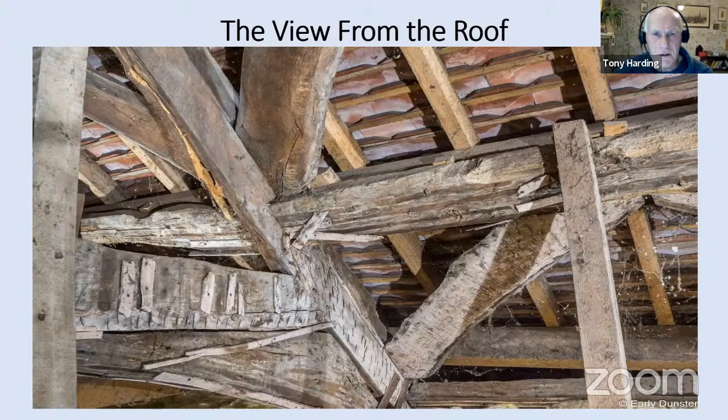So we're going to go on a tour of Dunster roofs and look at some of these features and methods. We'll stop off on the way from time to time to reflect on a couple of questions. The first one is, how can these differences in carpentry methods help us to date the building? We're very fortunate with Dunster that a number of buildings have, over about the last 6 years, been tree ring dated.

Tree ring dating, very briefly for anyone who doesn't know, is you take a sample of the timber and look at the relative differences in the widths of annual growth rings, and compare that with reference data. You can arrive at a date the tree was felled, and from that derive a date the building was built. You can get quite accurate dates to within sort of 20 or 30 years.

A lot of that dating was done by Andy Moir of Tree Ring Services as part of the Time Team study on Dunster, between, I think, about 2016 and 2018. It's really good to have those dates because they form a good basis for comparison with other buildings where we don't have tree ring dates, and we can do this comparison in what they call stylistic dating.

The other question, more of a philosophical one, is can we, by looking at carpentry methods, identify the work of a specific carpenter? I'd love to get to a point where I could say there's two houses built around the same time, and I reckon they were built by the same person. And if we can answer that, the tempting question that flows from it is, who was that carpenter? Whether we can answer that, I don't know, but let's have a go.

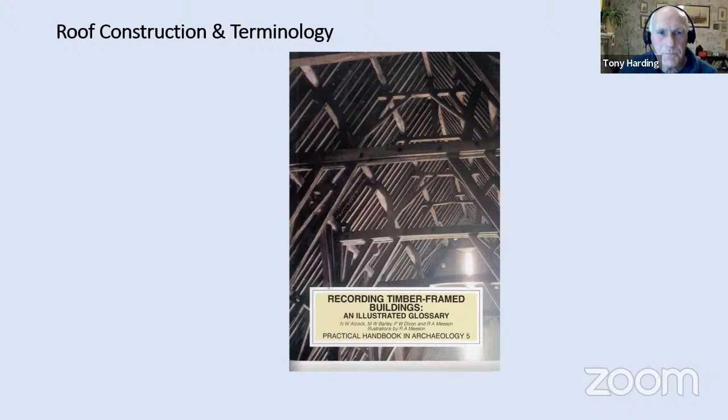So the basic building block of a timber frame building is a truss, sometimes called a cruck—a cruck is a special type of truss. I'm sure some of you joined Nat Alcock's superb webinar on cruck building back at the end of 2020. I'm not going to be specific about crucks this evening, I'm going to be more general and call them trusses.

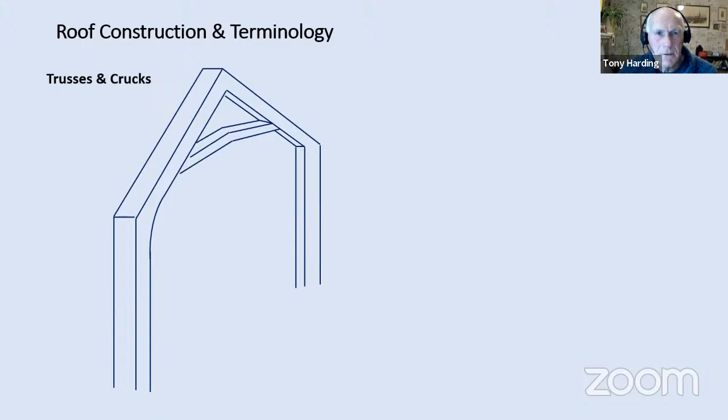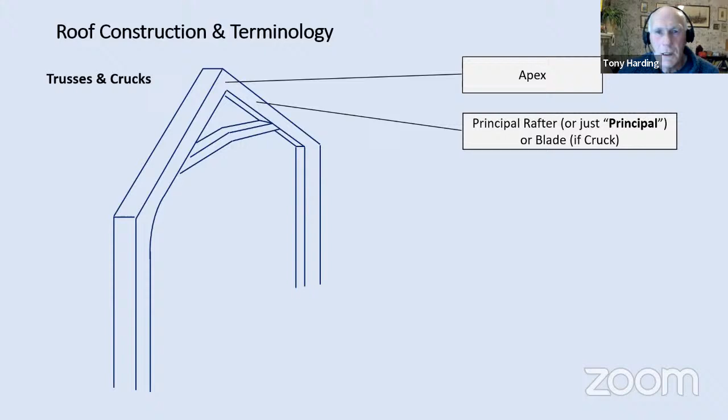To make a timber frame building, you start with the anatomy of a truss, two or three key features. It's like a big capital A, and at the top you've got an apex where the two halves are joined together, then a sloping portion which defines the pitch of the roof. That's got a number of names—it can be called a principal rafter, just a principal, or a blade if it's a cruck. I'm just going to call it principal tonight.

You then have the horizontal piece through the middle, called a collar—sometimes called a tie beam, but to me a tie beam is another horizontal member a bit further down, around the top of the walls, so that collar I'm going to call a collar. Then you've got the post, the vertical bit, post or foot. We don't always get to see that on our surveys, because it's very often now buried in the walls of the building. That's the anatomy of a truss.

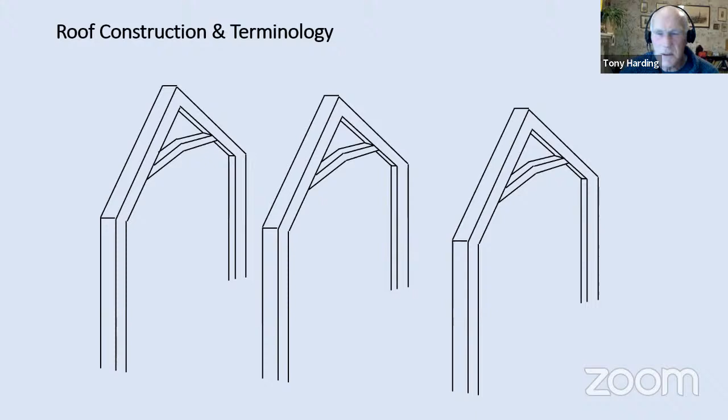A timber frame building is based around a series of trusses lined up—anything between 3 and 7 or 8, depending on the size of the building. Then there's a number of other timbers that go around those trusses, which we'll look at, not necessarily in the order in which the building is constructed.

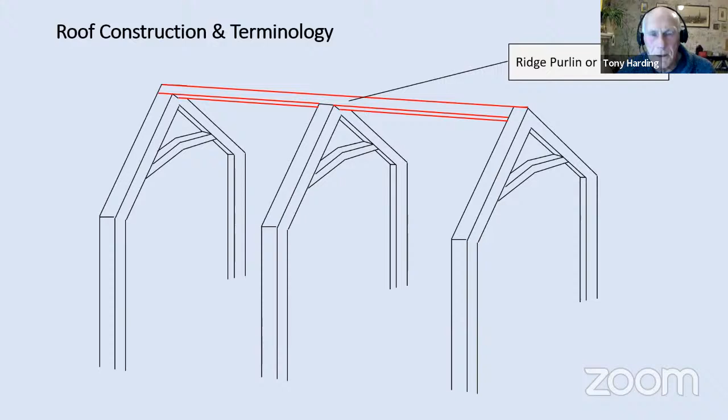Running through the top, you've got a long timber, called either a ridge purlin or a ridge plate—a bit of a semantic difference. If it's set diagonally, it's called a purlin, and if set flat, it's called a plate. Not quite sure why it's called a plate—plate to me says thin and flat, not long and square, but there we are, that's the terminology.

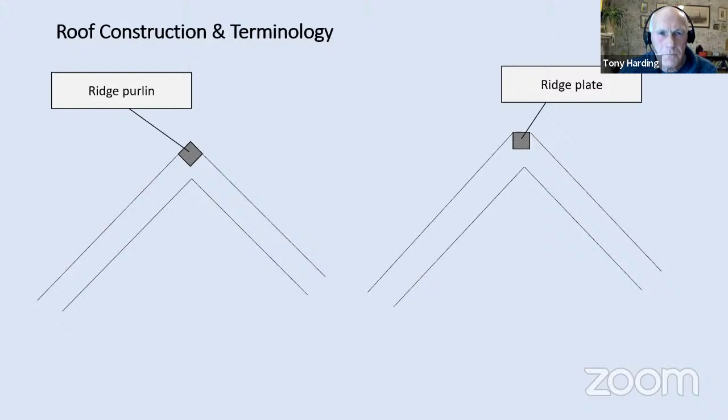Then below the ridge purlin or ridge plate, we've got some side purlins, and there may be 2 or 3 sets of these between the ridge and the top of the walls, depending on the size of the building. And then we've got what I call the pretty bits, the decorative bits.

You've got wind braces, which help to stabilize the building against lengthways distortion, racking as it's called. And you've got arch braces, again curved members, which help to stabilize the building against side-to-side distortion. You don't always get those.

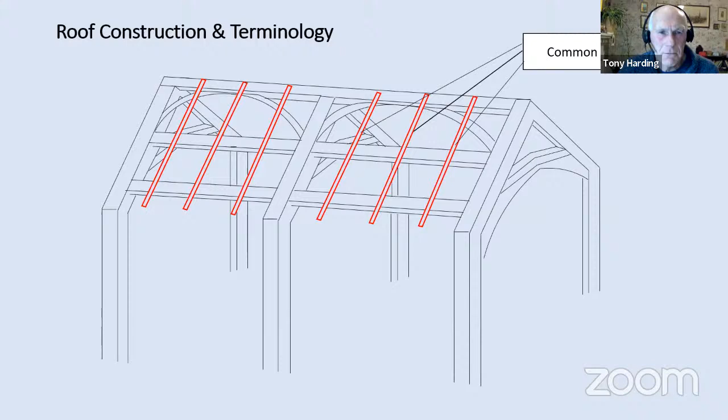You get those in some buildings, but not in others. On top of all that, you've got some common rafters, which rest between the ridge and rest on the purlins down to the top of the wall. And over that, you've got the roof covering, typically thatch in these early buildings.

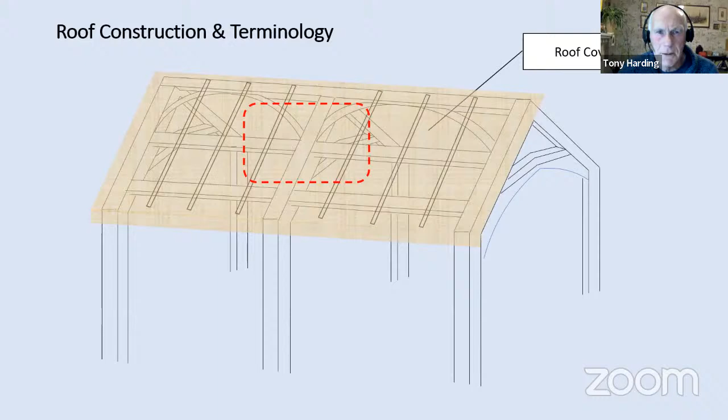So you can see, if you just look at this little red rectangle here, you can see how it starts to look like that picture that we started with. So that's a brief look at the anatomy of a roof.

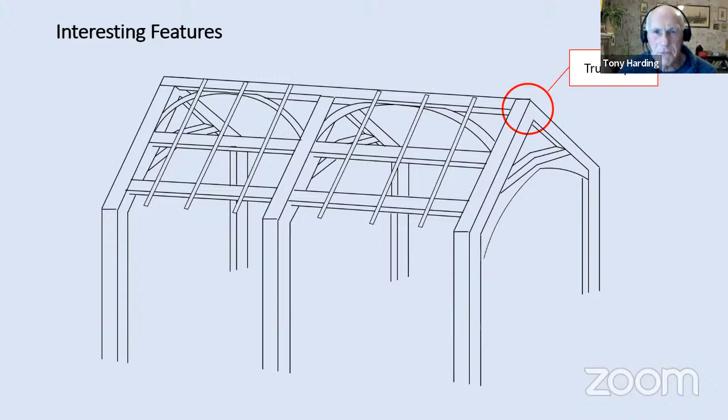So some of these interesting features, these methods that carpenters had - we're going to look at 3 areas tonight. We're going to look at the apex of the truss, where the principals are joined at the top, and there's a number of ways of doing that. We're going to look at collar joints, where the collar joins into the principal, and we're going to look at purlin joints, where the purlins intersect with the principal rafters. So these are the 3 areas that we're going to be looking at.

I thought it'd be useful first of all to pause and think about what makes a successful timber joint. Well, fairly obviously, it needs to join 2 or more pieces of wood together. But it also needs to withstand all the forces, or loads if you like, acting on it. And to enable it to do that, it helps if, when making the joint, we minimize any weakening of the component timbers. If you think about it, making a joint in timber almost invariably involves cutting wood away, which inevitably weakens the timber to some extent.

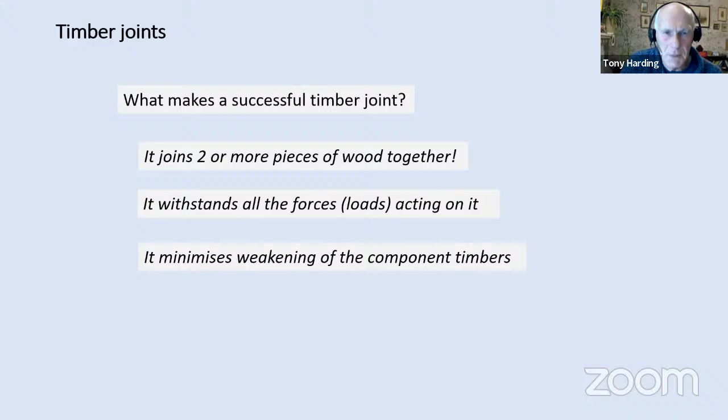So onto truss apexes then, and I may lapse into calling them apices. The reason for that is back in 1972, alongside my O-level in woodwork, I somehow miraculously gained an O-level in Latin. And there's a fragment of the Latin scholar in me that says the plural of apex is apices - index, indices, apex, apices - but I'll try and call them apexes tonight.

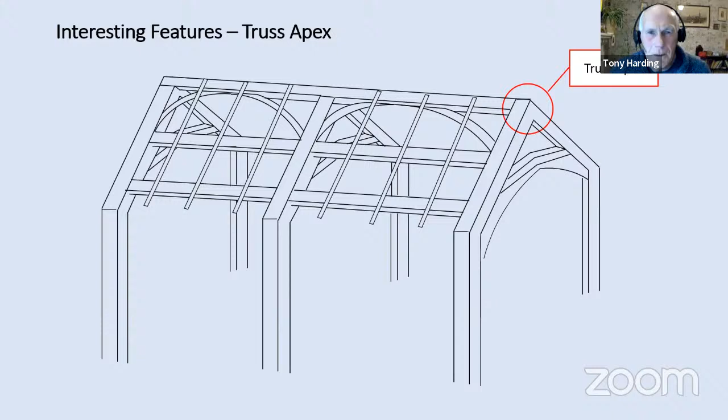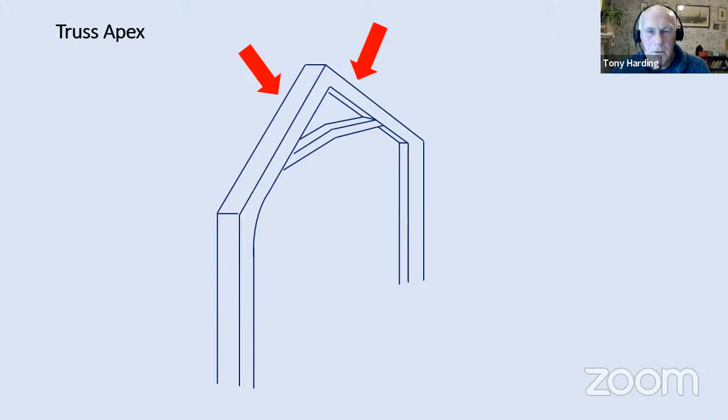So truss apexes, there's been quite a lot studied and written about apexes over the years. If you're just thinking about the forces bearing on the apex joint, it's got a bit of an easy life in a way, because in general the force on it is the weight of the roof, which tends to push the joint together, to hold the joint together. Not always the case, as we'll see.

But there's been quite a lot written about apexes and studied down the years. One of the milestone documents was a report published, I think, back in 1981 by the Council for British Archaeology - CBA Research Report number 42 - which brought together all the knowledge specifically about crucks at that time, and organized it into chapters and categorization.

One of the things it looked at was apex types, and it includes this, I think, really nice title of a pedigree of cruck apexes. I like the term pedigree because it suggests an order of descendancy, an order of development for apexes. And also I think pedigree is a suitably respectful term for the levels of craftsmanship that we've got going on here. So I like pedigree.

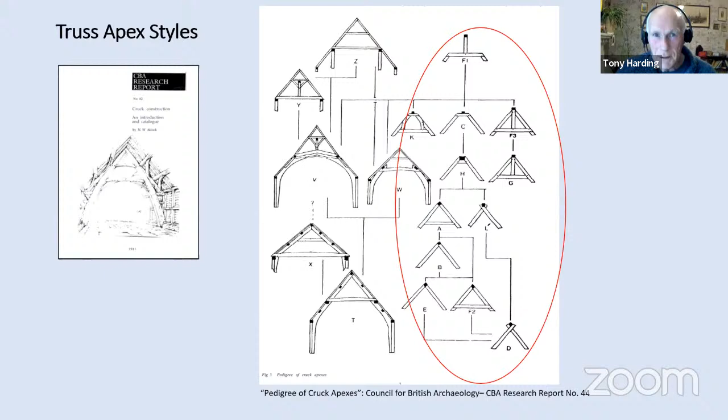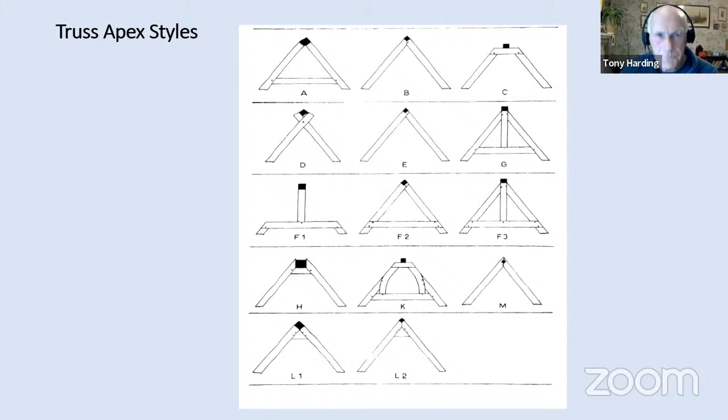We find quite a lot of these apex types in our surveys in Dunster, with some common ones in that red circle there. There's a table elsewhere in this CBA research report which just breaks out those common forms. So what we're going to do now is take a look at some of those forms and examples of where we found those in our surveys in Dunster. And the first one we'll start with - they've got letters that they're designated by. Don't worry too much about where those letters came from.

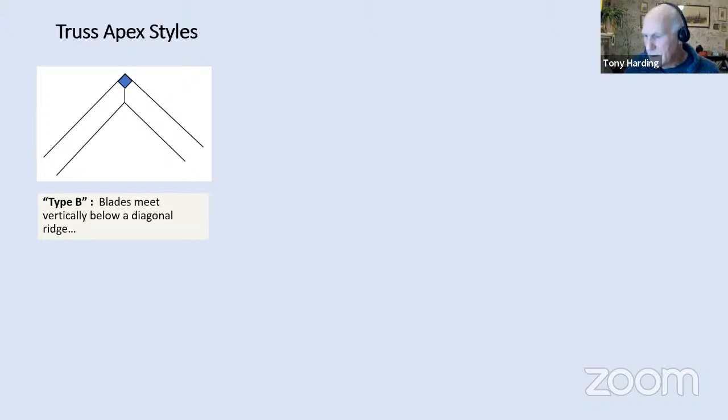Just go with the flow that it's called a type B. Type B is a fairly simple apex form. It's got the blades, and I'll talk about blades here because all these apex styles relate specifically to crucks.

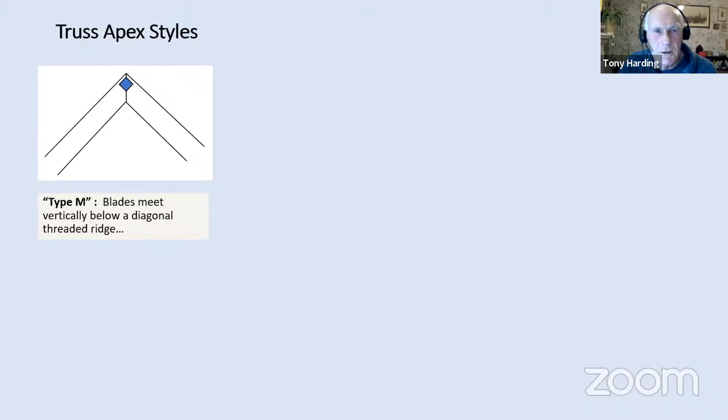Very similar to type B is a type M. It's a little bit more complex, a little bit more sophisticated, in that the ridge purlin, instead of sitting on the top, is actually threaded right through the apex joint. Here's an example of one. When I first saw this, I immediately thought it was a type B, but you can see the purlin is set down a little bit from the top, so it's actually one of these type M's.

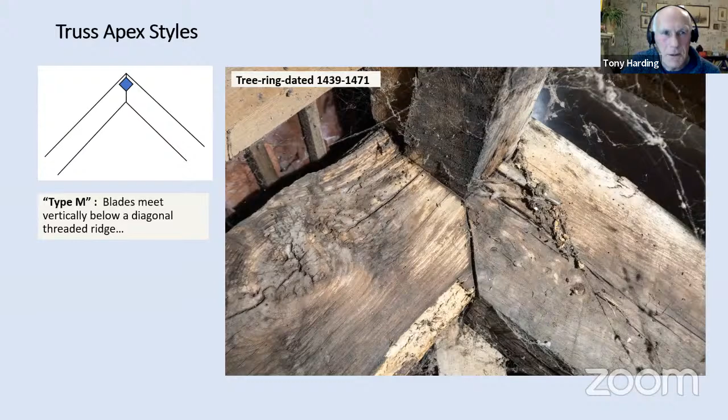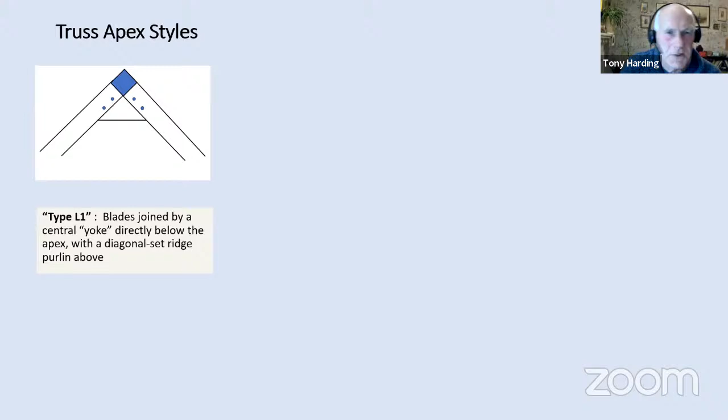So that's type M. We've got a type L1, and that's got a triangular block below the apex with again a diagonal set ridge sitting on there.

Then we come to type C, and a bit of a difference with this one. There's this saddle that sits above with a square set ridge sitting on the top there, and we've got an example of that.

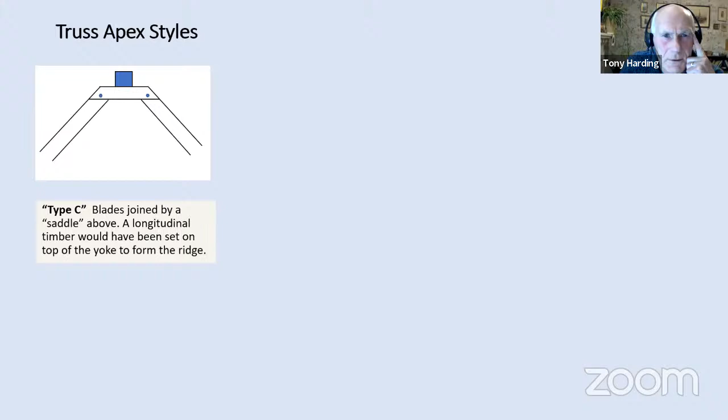You can see it's seen better days, this one. It's in a bit of a state of disrepair, and I will say at this point, people of Dunster and other dwellers of old houses, you will see some pictures in this evening's presentation that do show things in a bit of a state of disrepair. Don't worry, your roof is not about to collapse. Wherever there's been any deterioration of these trusses, they've invariably been reinforced and repaired, or there's another complete roof over them and they're still in place, but they've been relieved of their load and are now enjoying a well-deserved, well-earned retirement. So don't worry about what you see.

But you can see on this one, the right-hand side here is intact, but this left-hand principal has collapsed inwards. If you think about the load, the main load is the weight of the roof bearing down, and it's actually snapped this one and it's fallen inwards, and then there's been some masonry put around it in the position that it's in.

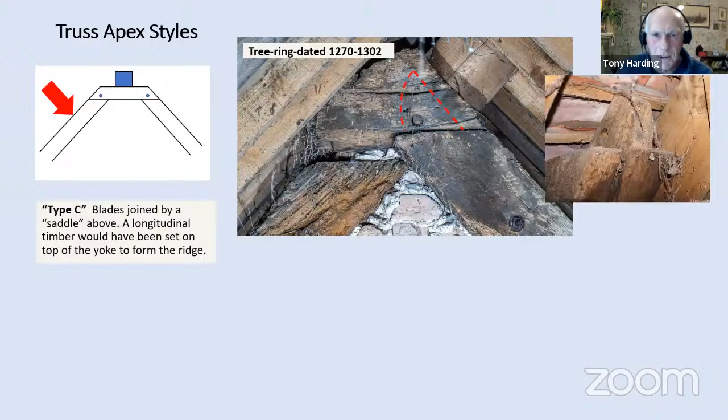Up inside there's another truss in this roof, the same style, and that top saddle is completely missing. You can see it's got this peculiar sort of horn-shaped tenon on the top that goes up into the saddle, so it's up inside there like that. I guess that's snapped in this case.

Now, one of the beauties, I think, of digital photography is we can use it to do a bit of digital carpentry. So what I've done here is a bit of recomposition. I've taken the right hand side, the good side of the apex, and glued a mirror image of it to the other side, so we can start to see what that apex would have looked like originally. So that's a type C.

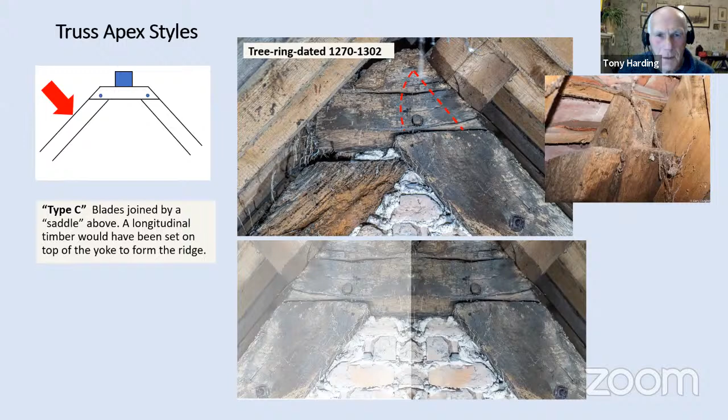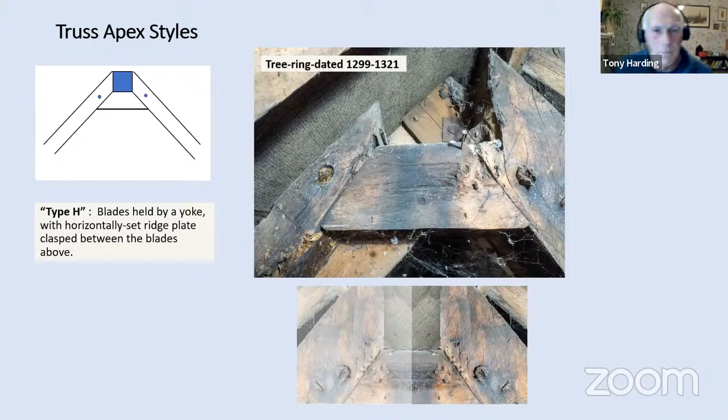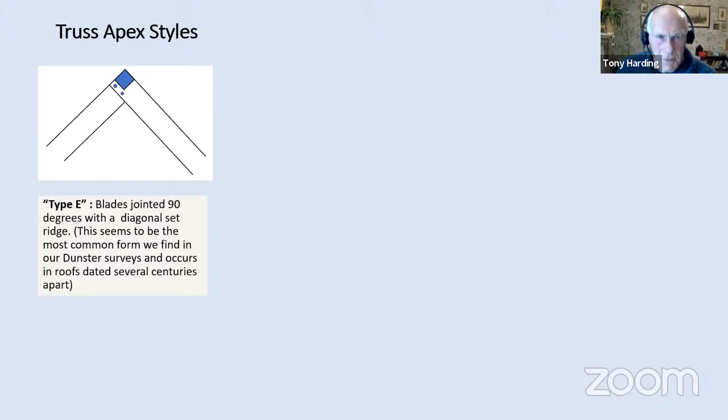Then we come to type E, and it's by far the most common type we find in Dunster. They seem to have been concentrated mainly in the southwest, and probably well over half the apex styles we find are type E. It's also one that's found its way into other types of truss and into later post-medieval trusses, some of which are modelled on this type E.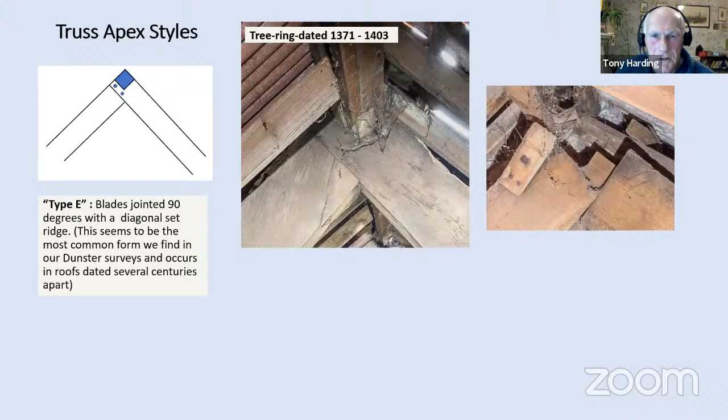Here's an example from a fairly early building, back end of the 1300s. Here's another one, and up inside there it's joined with a mortise and tenon joint. You can see this rectangular tenon on the top of one principal, which locates into a mortise cut on the other side of the principal.

Here's one to demonstrate the point. This one is probably as late as the 1700s, but it still retains this type E format, using the Cruck technology from medieval times.

And then a couple of later forms of apex. There's one which seems fairly obvious to me, where the blades, the principals, cross, and the ridge just sits in the V at the top. It does actually go back to Cruck days, to medieval times, and was called type D back then. But this one is much later, probably an 1800s, maybe even 1900s roof.

And then we've got this one. We've seen this in 2 or 3 buildings, a later form, with two principals, and either side of them nailed, in this case I think, a couple of yokes. You've got this sort of sandwich. Not quite sure what happens up in between there, whether it's a vertical join or a diagonal join. I'll have to go back and probe around inside one of these to find out which way it's done.

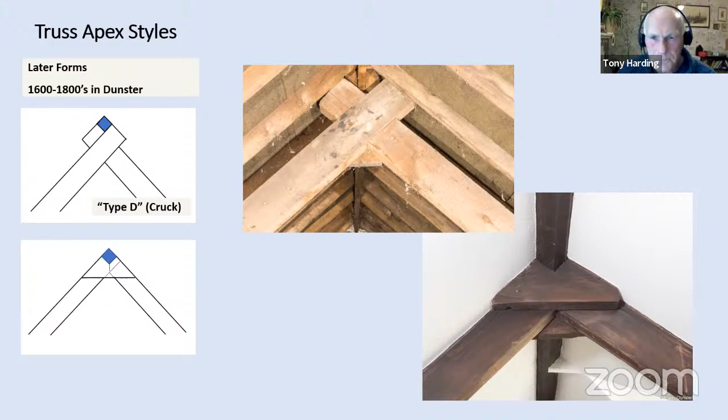So you can see we've got quite a number of different styles recorded in the roofs of Dunster. I guess I've got a sort of game of apex bingo going on here - I just need to find a type A somewhere, and I can complete the top row.

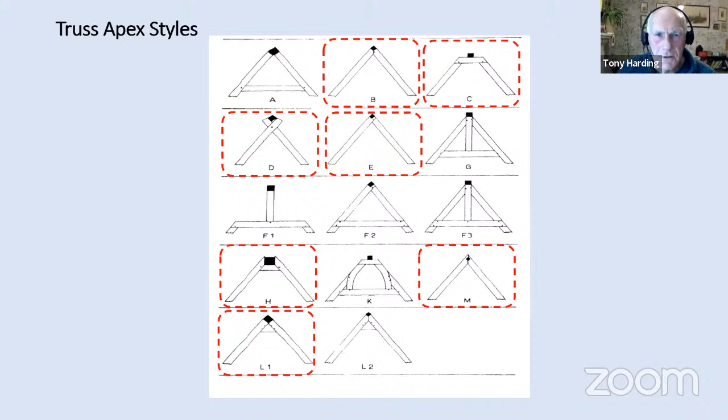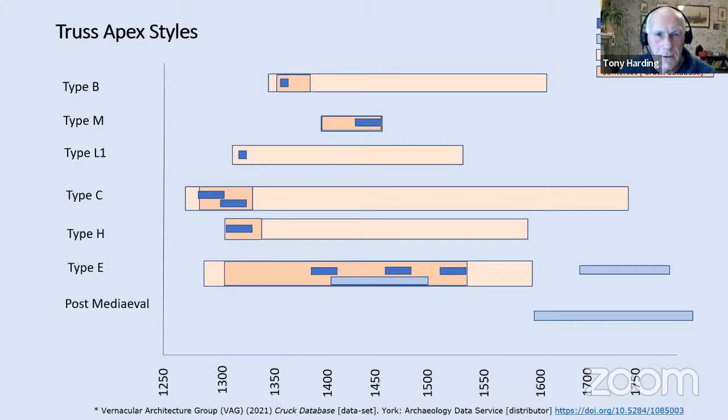What I find equally interesting though is rather than look horizontally across this chart, to look vertically down it. If we look at a couple of decades either side of the year 1300, it looks like in Dunster we had at least 3 different apex styles in play - we've got type L1, type C, and type H going on there.

The question that prompts me to ask is, what determined the choice of apex style for a given building around that time? And possibly more relevantly, who defined it? Was it the choice of individual carpenters? We've got these 2 buildings built a couple of decades either side of 1300, so probably within the career span of a single carpenter. I'm starting to ask, were they then the work of the same carpenter? Was there more than one carpenter in Dunster around 1300 doing type C apexes? I wonder.

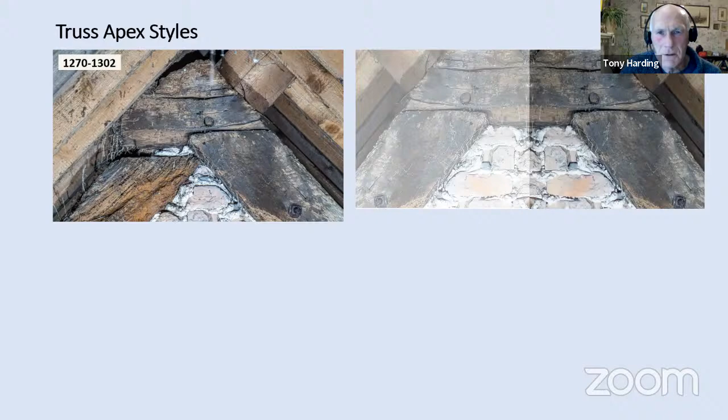And here they are. Here's one that we've already looked at from probably just before 1300. And there's another one 10 or 20 years after 1300 that looks quite similar. Again, it's suffered a bit of deterioration, so I've done the digital reconstruction and put it back together. Yes, they do maybe look sort of similar.

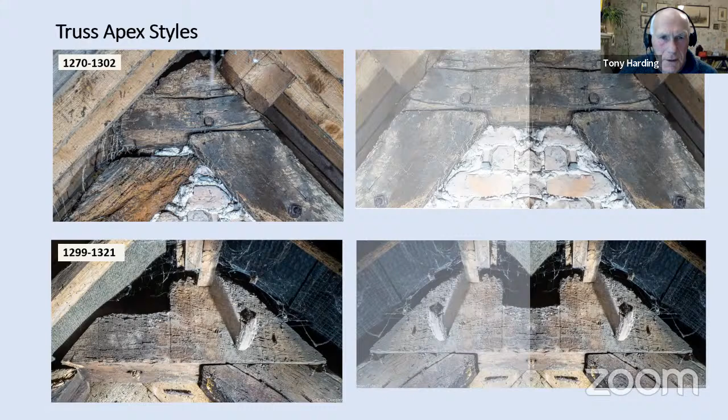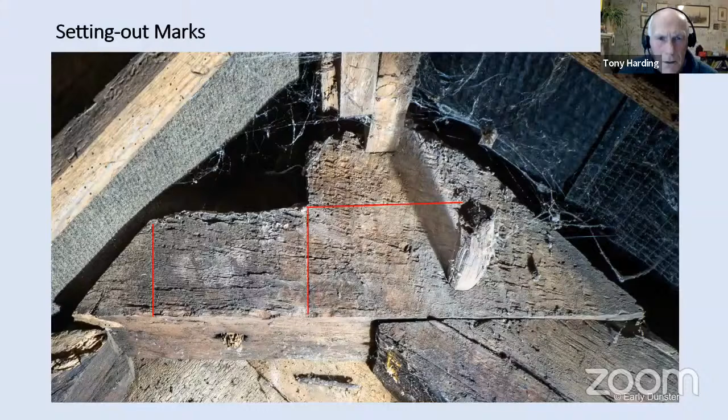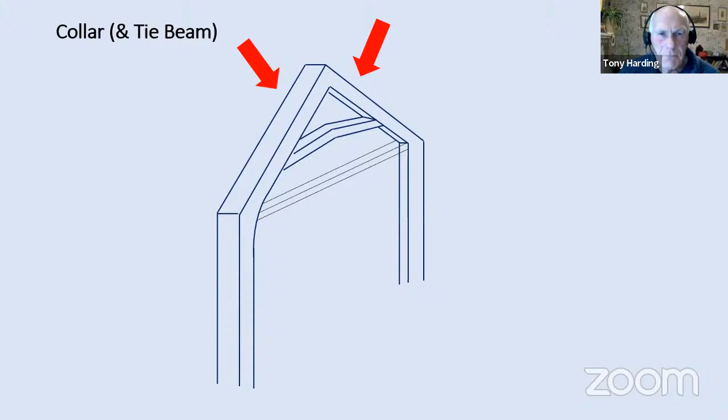So that's apexes. We'll move on now to collar joints. Collar joints are quite a bit simpler in a way. There's really only two types that prevail. The job that the collar joint does is, if you think about the truss, the load bearing down on it is the weight of the roof, and that's going to try to make the apex, the truss, sink and spread, and the feet, the posts, to move outwards.

Now that's pretty disastrous, really. If you think about the posts in a lot of these buildings were set in cob walls, and if those posts start to move outwards, that's potentially quite catastrophic for the building. So the collar does an important job in binding the truss together, and you can see a tie beam lower down again. The tie beam does the same thing.

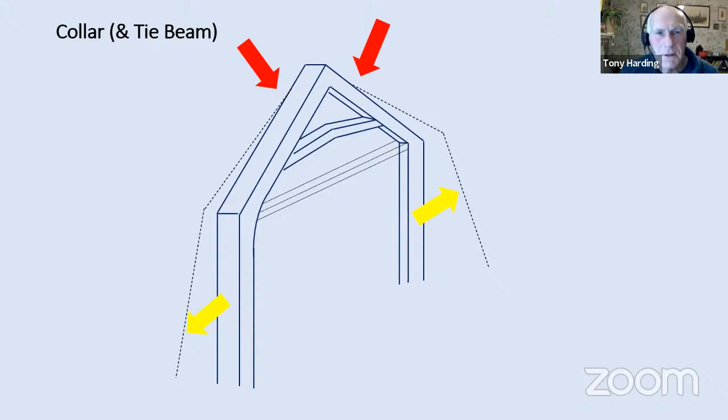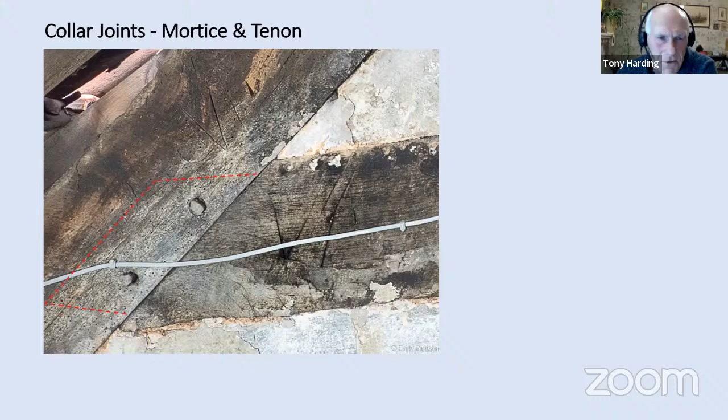So if we look at the collar joint, where the collar joins into the principals, there are two types. Most of the ones we find are a mortise and tenon. So there's a tenon, a peg if you like, cut on the end of the collar, and that houses into a corresponding mortise cut in the underside of the principal. So you can see the sort of shape of it speculatively there.

Here's one where you can see this spreading that I talked about has started to happen, and it's just temptingly revealing the shape of the tenon inside there. Again, people at Dunster, dwellers of old houses, don't worry, this has all been very competently and robustly reinforced. There's another one where the principal has sort of failed completely, and it's given us a unique glimpse inside of the shape of that tenon. I love this particular image. I think that's a fantastic bit of craftsmanship for something that's 700 years old. I never tire of looking at that, and it's sort of unlocked the mystery for me of what happens inside that joint at the end of that collar.

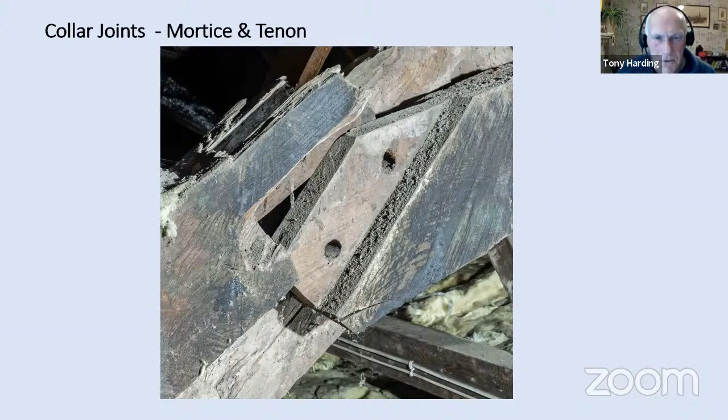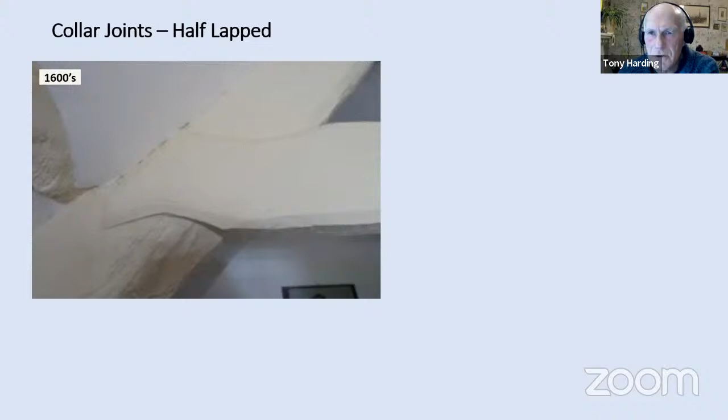So that's mortise and tenon collar joints. The other form we find is a half lap form, where instead of a tenon extending up inside the principal, you've got a sort of dovetail shape, some sort of profiled shape on the end of the collar, and that sits into a housing on the face of the truss, on the face of the principal. And we find these in later houses in Dunster, most of them sort of 1600s and 1700s. You can see a couple of other examples here. There's all sorts of variations for the exact shape of that end, but the ones we find are all later. But it is known to have been a very early form of joint as well.

One of the great recorders, perhaps the greatest recorder of timber buildings, was a man called Cecil Hewett. He did his work in the sort of mid-60s up to 1980. He recorded hundreds of buildings ranging from Saxon times right through to late 1800s, and identified and documented, and his books contain fabulous diagrams of just about every joint type that you could imagine. Hewett recorded these in very early roofs, 1260 and beyond, and also early examples have been recorded in Devon, just across the border from Dunster. But it's odd that we've not found any early examples of that in Dunster. We think sort of 1600 and beyond.

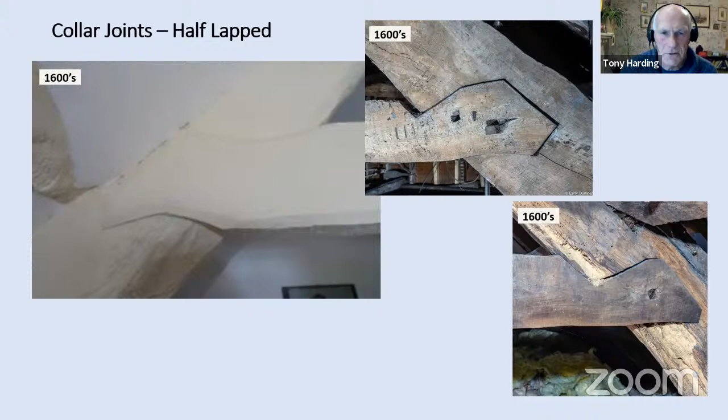There's another one there a little bit later. Again, you see it's the same thing, but without that dovetail shape, which helps to prevent spreading. But having said that, this one seems to be staying pretty much intact.

An interesting little juxtaposition that I only discovered in putting the slides for this evening together. Here's a cruck frame, the darker timber, from around 1400, and you can see it's needed a bit of reinforcement. What's happened, and it was quite a common technique, is to take timber salvaged from another building that's either derelict or being demolished, and use it to reinforce trusses in an existing building. That's what's happened here.

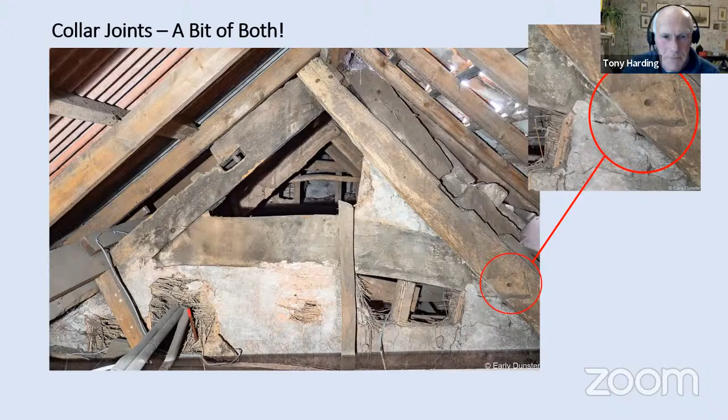There's this lighter piece of timber that's put on, effectively like a splint. It wasn't until I was putting this together that I noticed that on that piece of timber used to reinforce it, you can see the imprint of one of these half-lap dovetail joints, and there's another one there. So we've got a truss here with a mortise and tenon collar that's been repaired with timber from a truss that had a half-lapped collar. What I don't know is whether that timber came from one of these very early half-lapped collar joints or from one of the later ones. But I just thought it was an interesting little juxtaposition — don't always believe what you see.

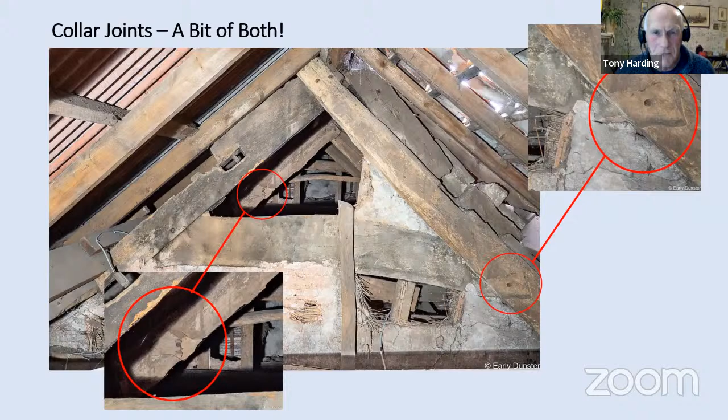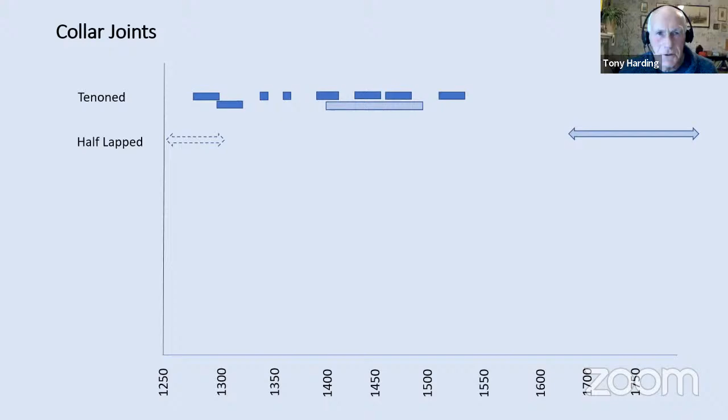So, lastly then, on to purlin joints. I think purlins are, to me, the unsung heroes in a roof. You've got a nice roof with the trusses standing there all strong and majestic, and the arch braces and wind braces all curved and decorative, and the old purlins just quietly get on with the job.

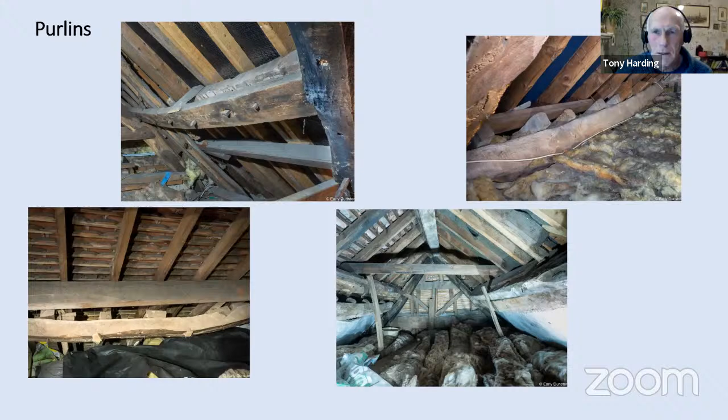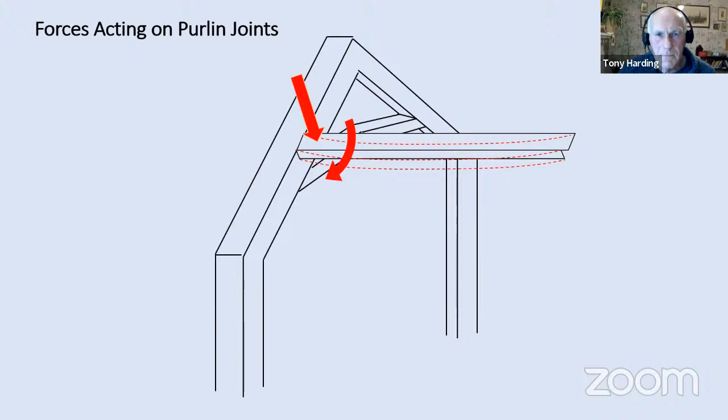And equally, it must be a tough job being a purlin joint. If you think about that joint in terms of forces acting on it: we've got the weight of the roof trying to shear the joint. As the purlin bends, there's a rotational force on the joint. There's also a tendency for it to twist as the purlin bends and the roof bears down on it. And any shrinking of timber or lengthways, longitudinal movement of the trusses is trying to pull the joint apart. So the old purlin joint is being literally pulled in all directions, and if that joint fails, it's obviously got quite a catastrophic impact on the roof.

So not easy being a purlin joint, I would say, compared with an apex joint, which is sort of being pushed together by the load on it.

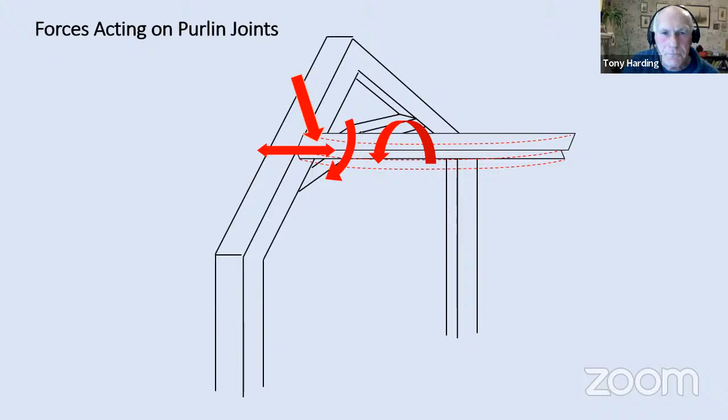There are a number of types of purlin joint that have been classified over the years as building recording has gone on. There's a couple we won't mention because we haven't found them to date in Dunster, but there's three types that we do encounter. The first, simplest form perhaps, is what we call a trenched purlin — very simply the purlin sits in a cutout, a trench on the upper side of the principal, and it just sits in there.

There's another type then, a threaded purlin, where you've actually cut a hole, a mortise, right through the principal, the same size as the purlin, and the purlin is effectively threaded through that mortise, through that hole in the principal.

And the third type, tenoned, sometimes called butt purlins. I'm going to call them tenoned because I think butt is a little bit more specific probably to one particular type. So more generally, we'll call them tenoned. We'll look at some examples of each of those in turn.

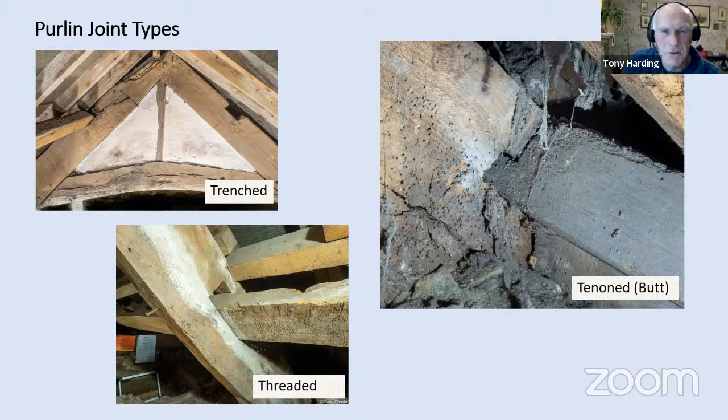So trench purlin joints. Here's a couple of examples. This one you can see it is actually pulled out. What you can see on the top left there, there's been a new roof, and it's not uncommon for a new roof to be put right over the original one. So that truss is one of these that's now happily retired, but it's revealed that trenched purlin joint, and there would have been a peg securing it into the principal there.

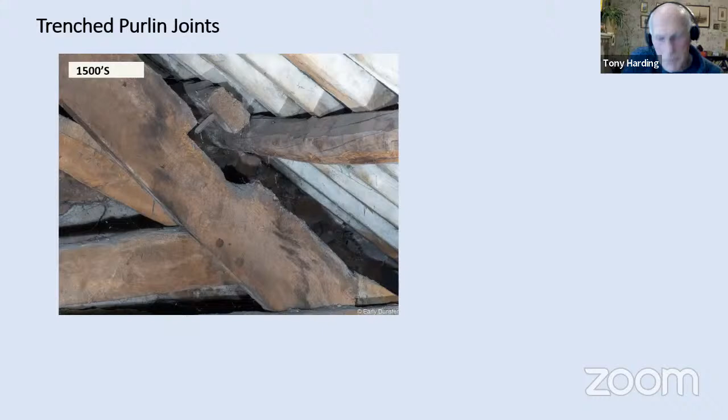And here's another example from one of those very early roofs, so just pre-1300. I've got my suspicions about whether this one is actually part of the original carpentry there. I think trench purlins can sometimes be a result of later modification and refurbishment.

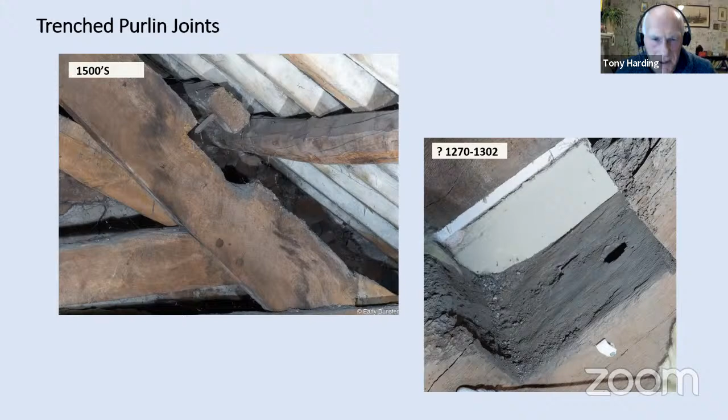If you think about it, if you were replacing a purlin in a roof - this is just practical speculation on my part - but I think you would tend to use a trench purlin, because if it was previously a tenon purlin, jointed into the principals, then you've got a problem replacing that like for like, because to fit it in there you would need to spread the trusses apart. So I think some of these trench purlins could be a result of later refurbishment, which is possibly what's happened there.

Similarly, if you're replacing a threaded purlin, you've got the challenge of threading a long piece of timber through that roof. So just beware of trench purlins, that they may not necessarily date from the original.

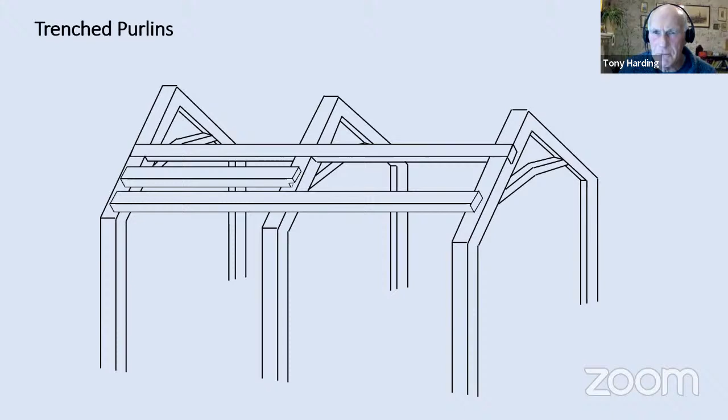One that I'm a bit more confident is original work is sometimes we get what we call a locking rib in the bottom of the trench. So instead of the trench being cut right out to a flat base, there's this rib left in there, and the purpose of that is to stop the purlin moving lengthways, longitudinally, relative to the truss.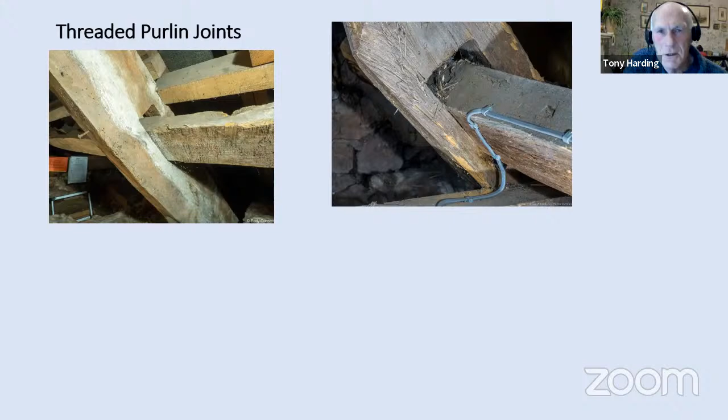Disadvantage of that is you're actually cutting - there's probably a fairly extreme case here - but that's quite a hole cut through the truss, through the principal rafter there. So thinking about our requirements for a joint, that's probably had a significant weakening effect on the truss. Having said that, that's been there for 600 years and is still going strong, so it's probably proved me wrong.

Although they're called threaded purlins, that's a little bit of a misnomer in a way, because sometimes the purlins are actually joined within that mortise, usually with some sort of splayed join. Ignore this bit of timber up here, that's new, but you can see the splayed end of the purlin in there. And here's another example, you can see the start of the splay there, and the length of purlin coming in from the other side would have been splayed in the other direction, and the two would fit together.

So lastly, we'll look at some tenon purlin joints. Here's probably the most basic form. Again, this is from the second half of the 1400s, and you can see there it overcomes the problem of cutting a great big hole through the principal, but you overcome that by forming the end of the purlin into a tenon, which then fits into a smaller mortise in the principal.

You can see it there. I've outlined the shape of that tenon. So if you imagine a section through that joint, you've got the purlin there with that tenon extending into the principal rafter.

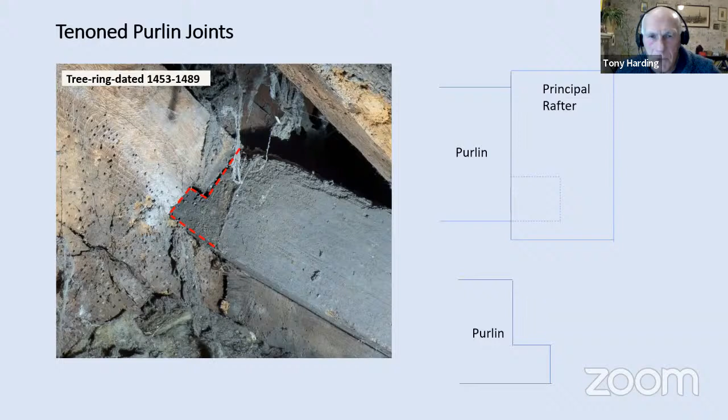The disadvantage for that - you've overcome the problem of cutting a great big hole in the principal, but you've compromised the purlin somewhat, because if you think about that shear force bearing down on it, you started off with a purlin that thick, and effectively you've reduced it down to something like a third of its size, and therefore a third of its strength.

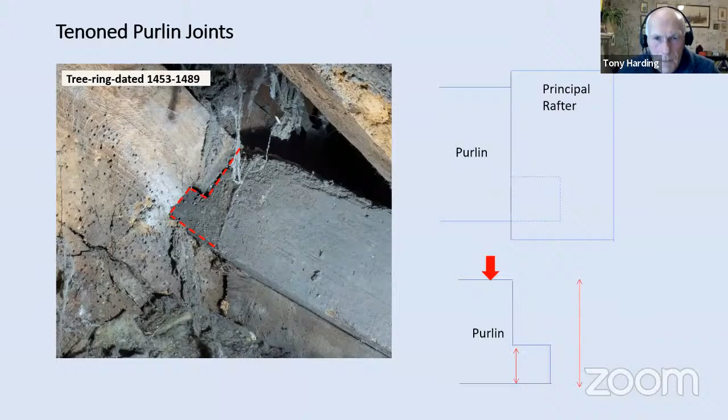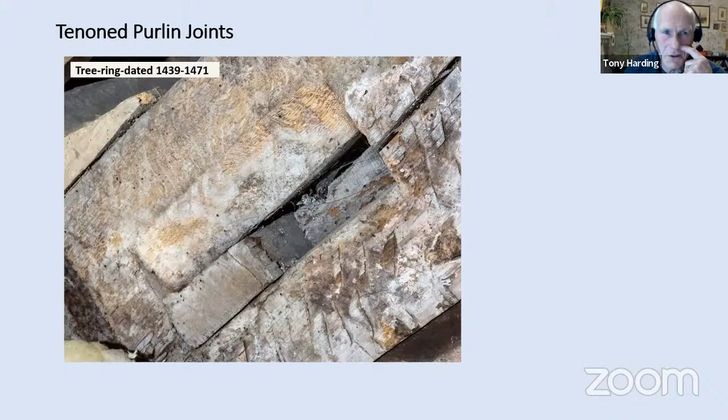So there's a couple of ways that carpenters had of getting over that, and here's one, and this has got quite an interesting story to it. This one's tree ring dated to somewhere between 1439 and 1471. You can see what we've got is this bevel on the upper shoulder of the mortise, highlighted in red. So quite cleverly, you've made a small triangular cut in the principal, which doesn't weaken the principal a great deal, but allows much more of the purlin to extend into the principal, so now most of the purlin is actually bearing the load.

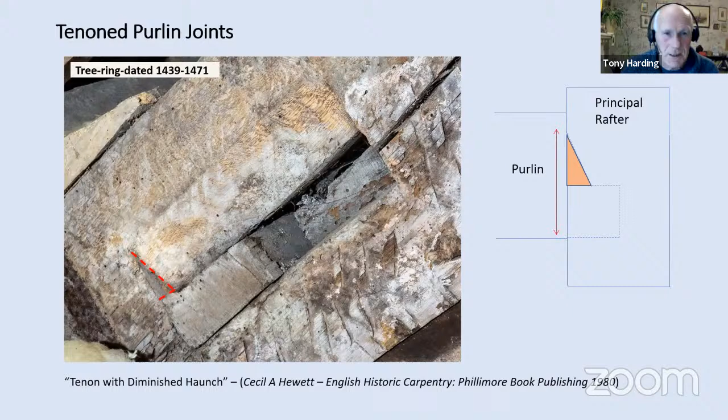Now this one's got a bit of a story to it, because this same joint is in the roof of the priory, the later section of the priory at Dunster. Cecil Hewett, that recorder of buildings I mentioned, recorded one of these in the roof of King's College Chapel at Cambridge, and he's given it a name - a tenon with diminished haunch. Hewett found this joint in King's College Chapel and attributed it to a master carpenter called Richard Russell, who he thinks put it there somewhere between 1510 and 1512.

There's some very good information on the King's College website, and their version says that although it was built by Russell, it was actually part of a design done by his predecessor, Martin Prentice, somewhere between 1476 and 1485. So Russell may well have at some point had the rather poetic job title of Prentice's Apprentice. So although Russell put the joint in, it was Prentice's design. It says here that Prentice's design is said to contain the earliest examples of tenons with diminished haunches. Well, actually not, because here's one in Dunster that's at least 5 years earlier than Prentice's believed design for that joint.

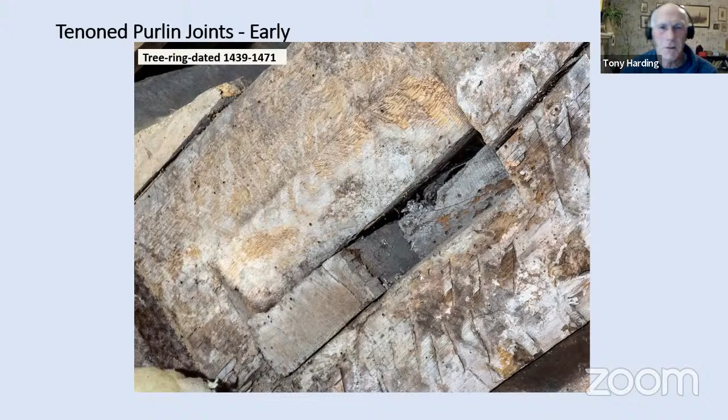So the question that poses then is, was Martin Prentice, the carpenter, involved some way with the priory at Dunster? And if he wasn't, then was the carpenter that did the priory at Dunster the same person that told Martin Prentice about this joint? So an interesting bit of history to that one - it could be a bit of a first for Dunster there.

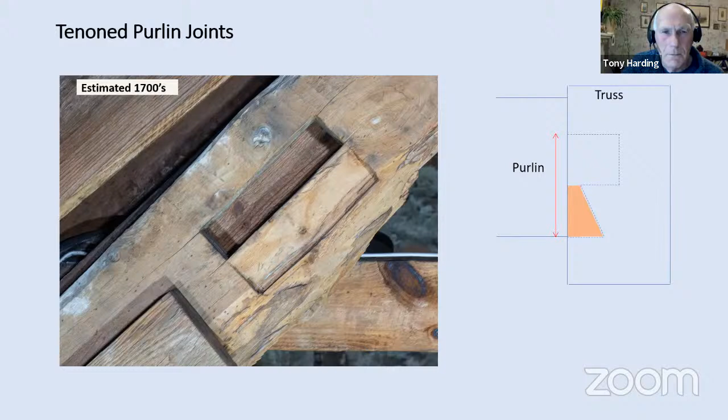A later example - you've got a similar thing happening here, except that triangular cut into the mortise is below the tenon rather than above it. But it's had the same effect - it's actually brought much more of the purlin into play, and therefore much better equipped to withstand the weight of the load, the weight of the roof bearing down on it. You can see that's just that little triangular cut there.

Some later ones had a version where the tenon extended right through. The purlins at this stage were staggered, so offset from each other on each side, and a peg driven through. It's rather like if you can picture those farmhouse style tables with the lower rail running through them and a peg banged through where it extends out the other side of the leg - it's a little bit like that.

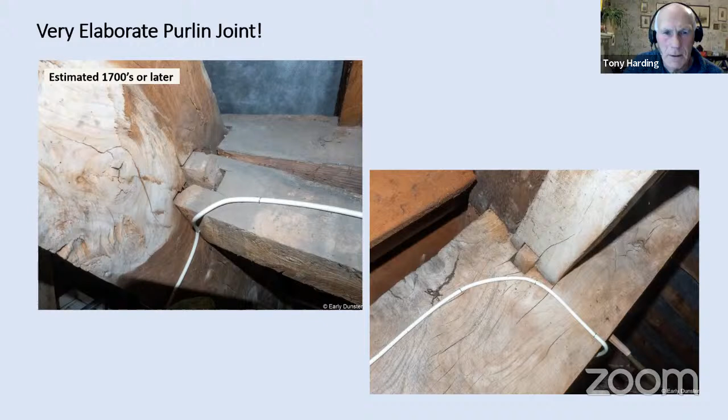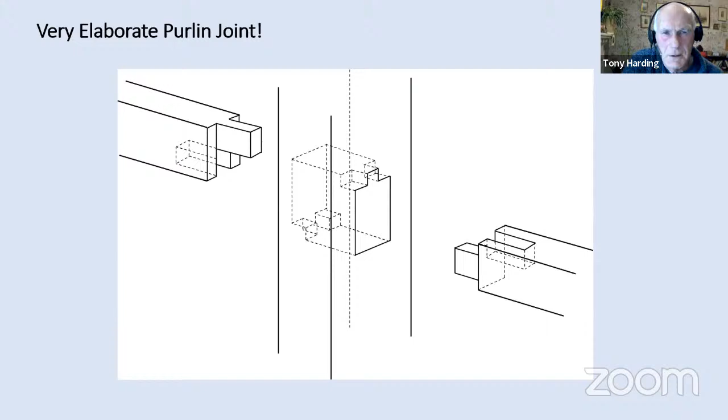And then lastly, this one confounds me completely. From one side, you've got a bit of tenon sticking out at the top, and from the other side, on the right, you've got a bit of tenon sticking out on the bottom. I've puzzled and puzzled over this one, and I can only think that inside there's something like this. Using the terminology, you'd probably call it something like a part staggered threaded purlin with bridled scarf joint. What confounds me is why on earth you would do something so complex in that joint. It must have been a carpenter with a real enthusiasm, a real verve for his work, I think.

So purlin joints - what can we tell about chronology? Well, tenon purlins look to have occurred, and these are actually from tree ring dated examples, and they prevailed over several centuries. Trench purlins we think came later, but with that note of caution that some of those may have been a facet of later refurbishment. And again, from what we've seen at the moment, threaded ones seem to be sort of 1500 onwards through to sort of 1600.

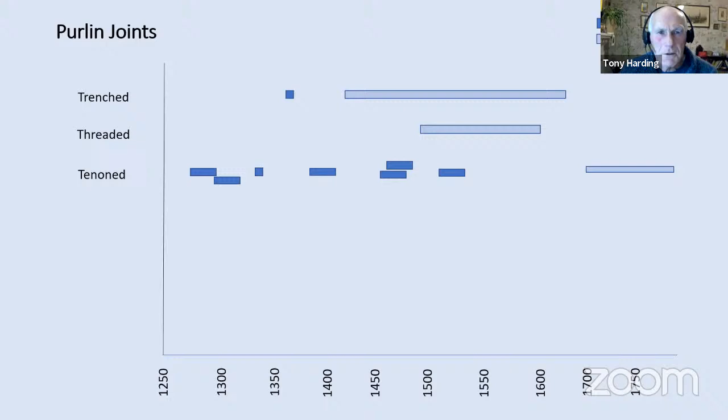So if we put that all together, what I'm thinking is there's some uncertainty with this stylistic dating, looking at a particular feature. But I'm wondering if we looked at the combination of features - and we've only looked at 3, there are others we could look at - whether those particular combinations help point us towards a particular date for that building.

And I'm drawn again to these 2 buildings, these 2 roofs that were built a decade or so either side of 1300. If you look at it on that basis, they've both got the same type of apex, type C. They've both got tenon collars - nothing remarkable about that, because most of the collars we find there are tenon. And they've both got a similar form of tenon purlin.

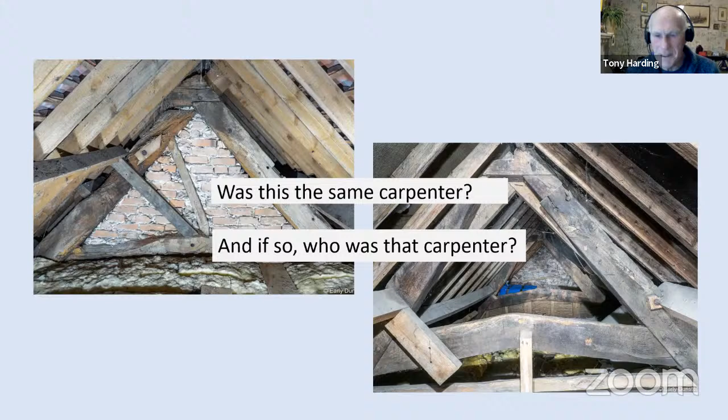So it really does start to reinforce that question with me - and there they are, you can see the 2 trusses in question. It makes me ask, was that the work of the same carpenter? I'm wanting to think so, really. And if it was, the question that leads from that is, who was that carpenter? If I ever find that out, I promise to do another webinar on it. So with that, I'll hand back to Lizzie, and thank you for listening.

Thank you, Tony, it's been really good. It's quite nice for me because I always find timber framing quite difficult, really, and it's lovely to have it all spelled out so carefully and clearly, with all the names given to the right things. So yeah, well done, thank you.